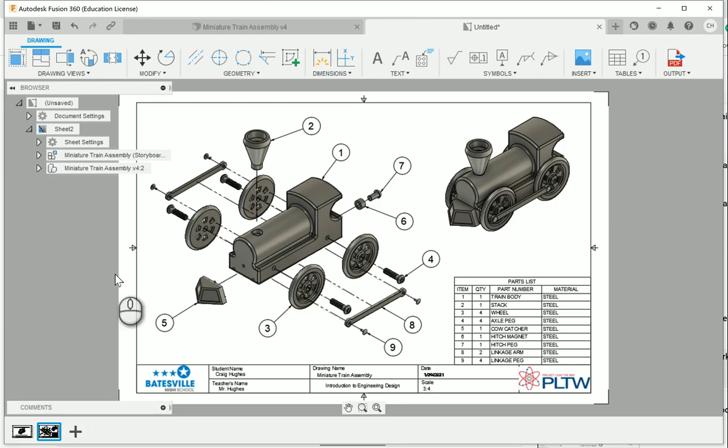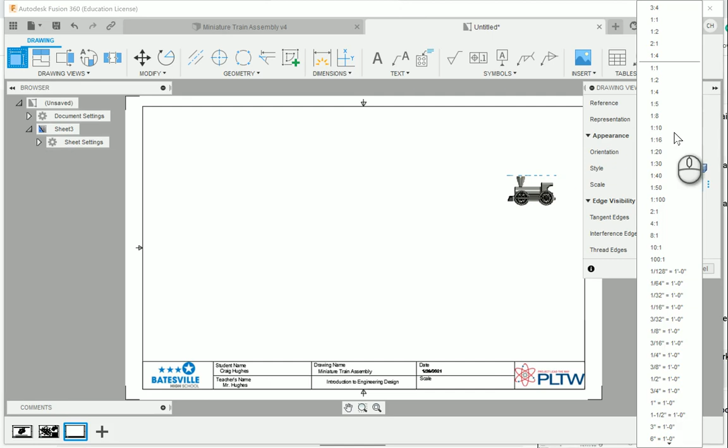Down in the bottom left corner, I'm going to go ahead and add a new sheet. From here, I'm going to click on Base View, and utilizing the train as our base view, I'm going to turn it over to the right side so we can see the train like this. I'm also going to bump up the scaling to a 1:1 scale, place that right here, and say OK. Now the other thing is I need to just pick out the train body.

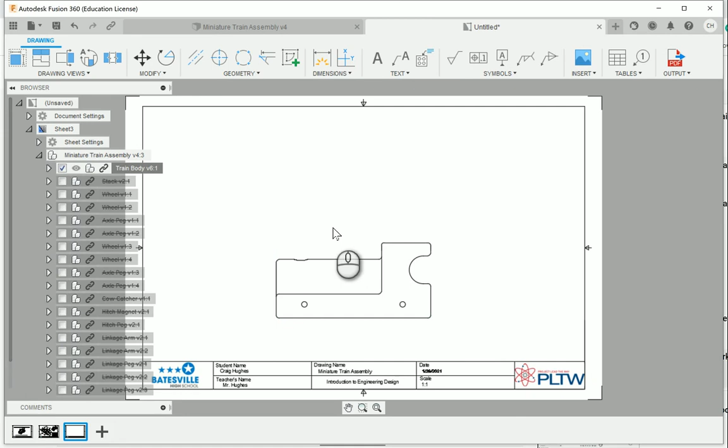So the train body is right here in my browser. I'm going to right click on it, and choose suppress all except selected. This will suppress all the other items except for the train body I have going on here. What I'm going to do is collapse my miniature train assembly here in the browser, and I can go ahead and project the top view, the back view, and the front of the train, as well as the isometric view.

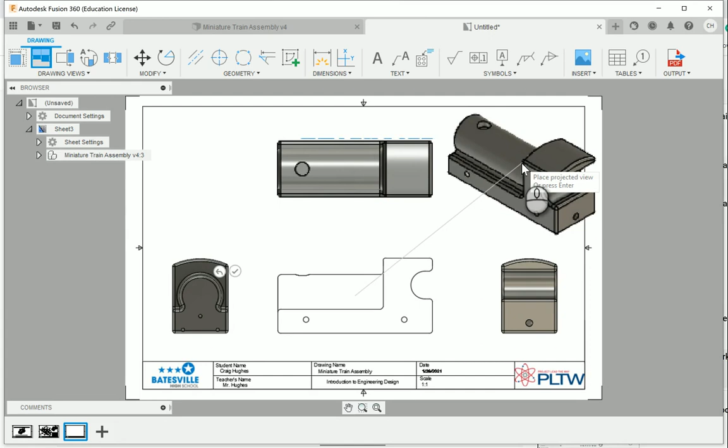However, the isometric view is in this orientation. I really want it to be a little bit different. So actually I'm going to go ahead and just hit the green check mark, and place these views.

To get a proper isometric view, I'm going to choose projected view, select this front view, and then go up diagonally, and this is going to make it look like just what it's on the sheet. Go ahead and click place.

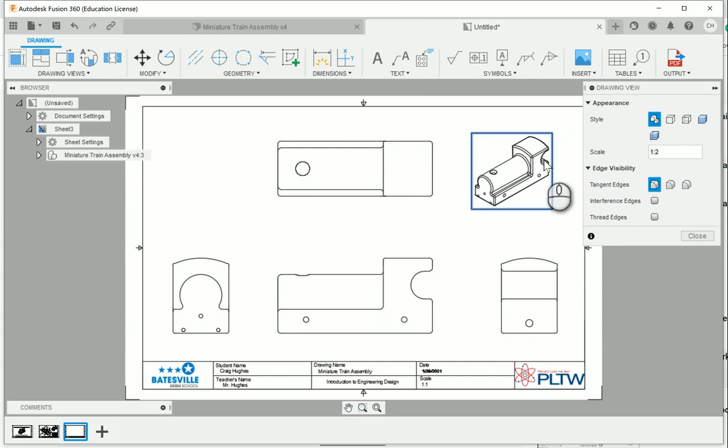And let's change the scaling. So here we're going to go to half scale, shaded, and go from here.

I am going to change the line style on this one to hidden lines. You will see that all the other ones, this is the only issue, is that if we go through and do show hidden lines on any of these, they do go through and cause a little bit of issue. So I'm going to actually keep that off, because we're going to be able to note a lot of the depths and everything utilizing our dimension tools.

As far as this goes, this sets up our views. Everything else should be ready for you to start dimensioning.

So for the holes, use the hole and thread command, and make sure to place center marks anywhere you see center marks on that drawing. For the text note, make sure you click the text option, and below we can use that to put in this note, which comes from the drawings that were provided to you, and they can be put in just as being shown.

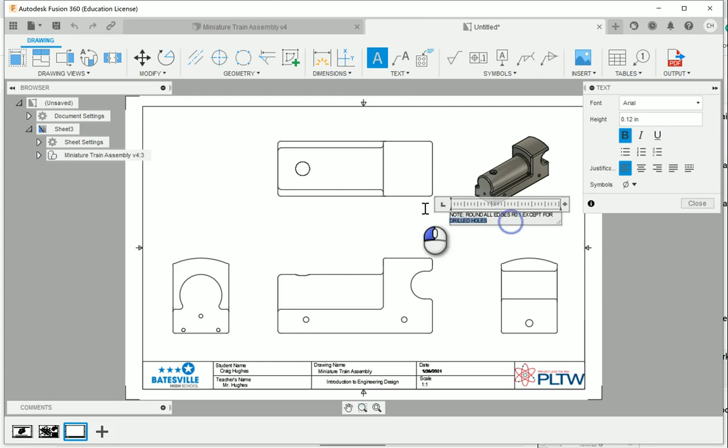So this goes through and prepares your drawing to be dimensioned, and again just replicating the same dimensions that you have on the printed drawing that has been provided to you.

Check the next video to see how to set up for the train stack drawing.